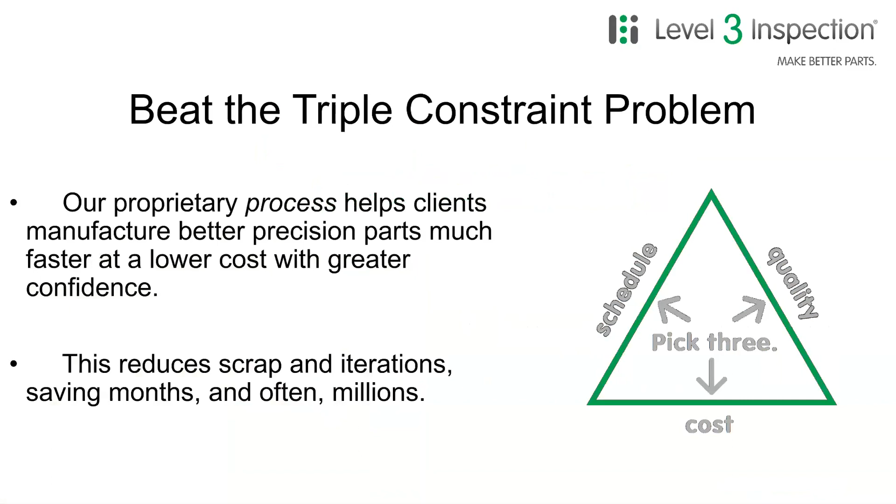Pick two. If time is money for your business, like it is for most of our clients, you can now have three because we are so much faster and so much better and provide such greater value for decision support than any other inspection method or process.

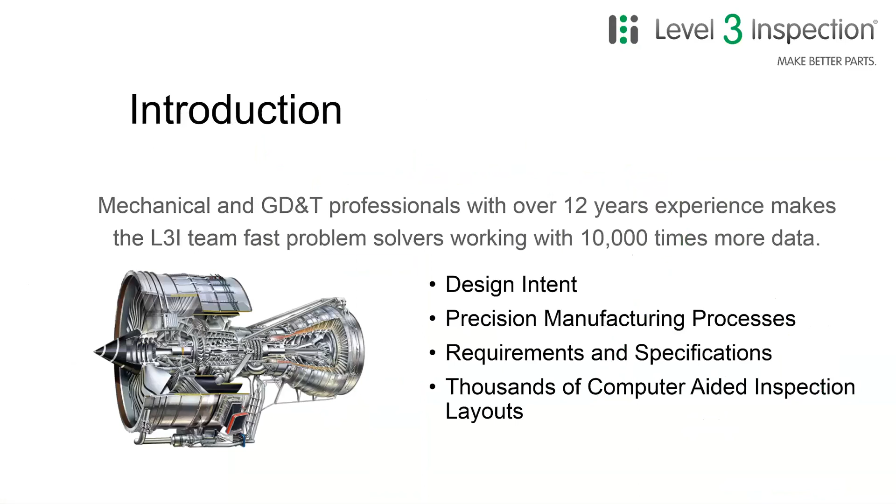By way of background, we are engineers, metallurgical, mechanical engineers with domain expertise in turbine engines, aerospace products, and all manner of precision manufacturing. We're dimensional and tolerance professionals with over 12 years experience using these 21st century optical metrology tools. We understand design intent, manufacturing processes, all of the requirements and specifications, and we have performed nearly 9,000 computer-aided inspection layouts over the past dozen years.

If you haven't seen one before, here's what a structured light metrology 3D scanner looks like. On the right, there is a projector that projects a pattern that moves across the surface of the part, while the lens on the left observes the way the lines undulate across that surface, and it digitizes whatever is in the field of view.

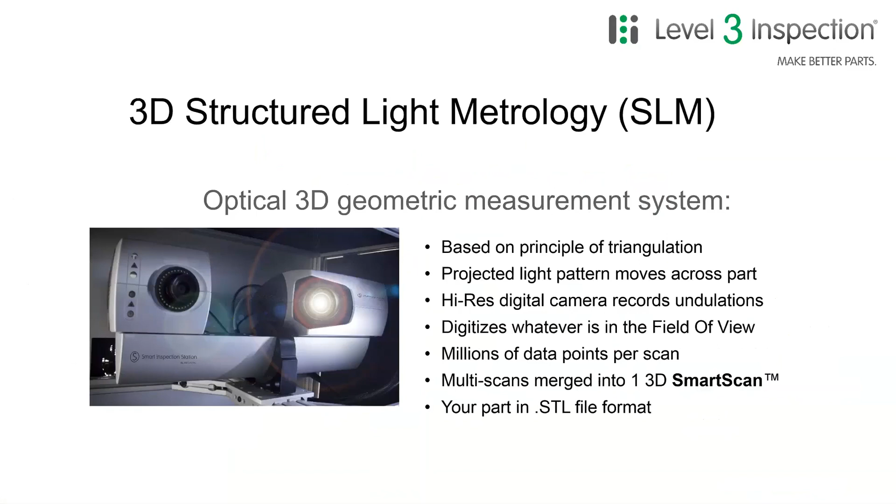Millions of data points per individual 3D scan are gathered and merged together into a point cloud that is then converted into an STL file. It is the surface of the part with millions, tens of millions, sometimes even hundreds of millions of data points, completely digitized, usually watertight, and converted to an STL file format for further analysis.

Where this fits into the process of making parts is as follows. Everything starts with computer-aided design. The CAD model is the master reference file and is what starts the operation of making a new product.

Computer-aided engineering with finite element analysis, strengths of materials, cycling, desktop wind tunnels, whatever it might be to improve upon that design and optimize that design. Then comes computer-aided manufacturing. Regardless of the manufacturing method, some sort of computer control is applied, and they are used to improve production and quality.

Our world is computer-aided inspection, shown in the lower right here, and it is back to the reference files from the computer-aided design process, namely the CAD model and the blueprint and all of the other requirements and specifications that are needed. If allowed to, we can accelerate each of these steps, and we have the experience of improving the

way our customers dimension their blueprints to get better benefit from our 3D inspection. All of these can help accelerate parts throughput, parts inspection, parts deliveries, and parts conversion to profits.

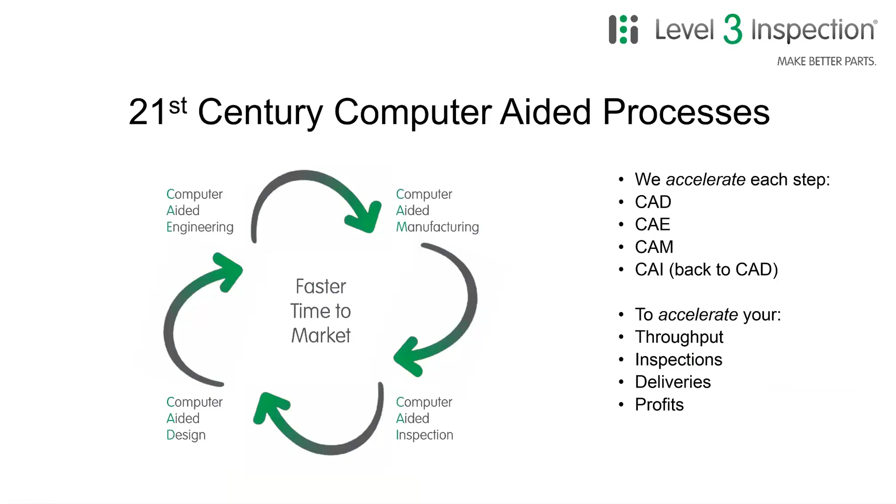An overview of our computer-aided inspection process is as follows. We scan the part, as we mentioned earlier, and scanners are monochrome, so we designate blue to represent the scan file. The CAD model is represented in gold because it's the gold standard.

We don't modify them, we just use them, preferably in native file format to avoid any compression errors. And we align the scan file to the CAD model in a number of different ways, primarily datums, especially for aerospace, but what can also be other features or overall best fit or feature best fit. So there's a number of ways that we can analyze the part compared to the CAD model in this Smart Compare review.

While that is going on, we are computer itemizing the blueprint to create an integrated process that goes from the blueprint all the way through to the report form.

And then we extract the dimensions, either all of them for a Smart FAI or a subset of them, perhaps the critical to quality dimensions for a Smart Inspect, and deliver all of this comprehensive information in an Adobe Acrobat portfolio over our secure FTP server or our client's secure FTP server.

In all, this is digital, it is trackable, trendable, traceable, auditable, and all of our information is also available in XML file format, so it can be integrated into statistical process control systems.

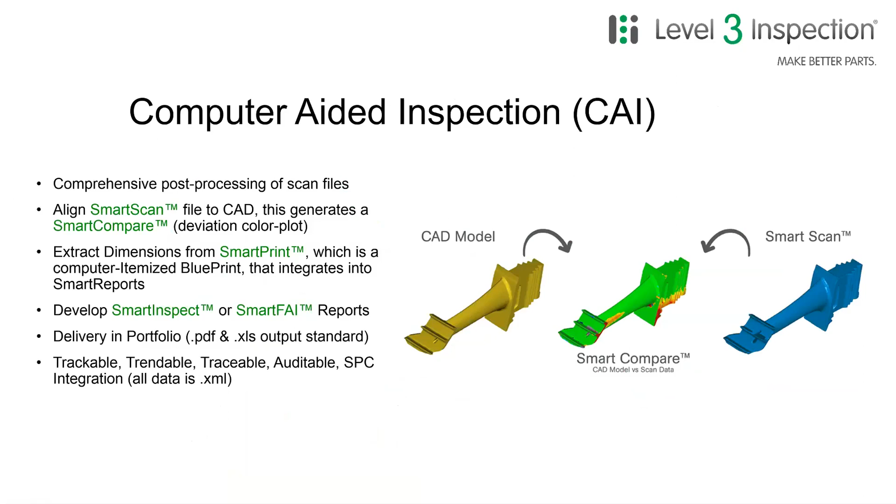Another review of this process is, again, starting with the Smart Print, the computer itemized blueprint that actually creates and merges the data through the inspection process into the inspection report.

The Smart Compare is the Smart Scan aligned to the CAD model in the prescribed way, again, typically datums in aerospace. A Smart FAI for 100% of the dimensions reported, or a Smart Inspect for a subset, less than 100% of those. The AS9102 report form with conditional formatting to show nonconformances, automated data processing into a myriad of other reports for engine prime specialty or any other requirement for electronic output and reporting.

The results that are non-conforming are actually highlighted back on the Smart Print by changing the balloon color. All of this is done with minimal human input to prevent data massaging error. We have an integrated, automated process for doing this where humans aren't cutting and pasting data.

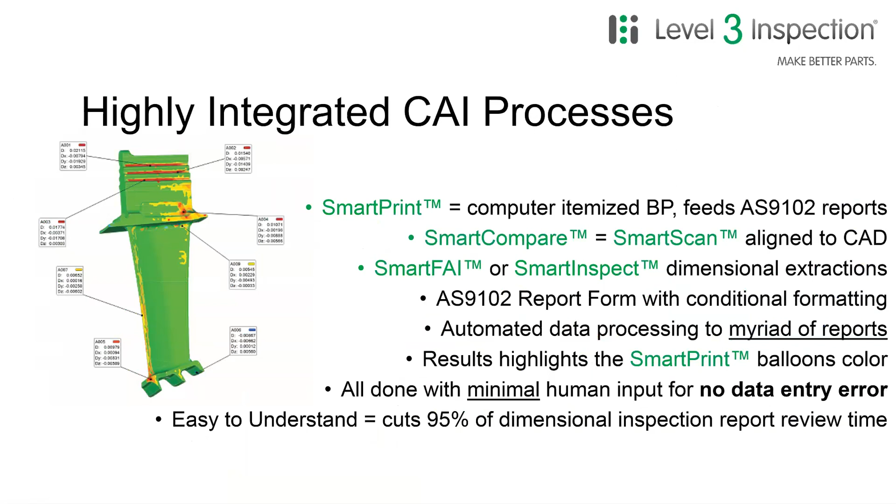Our customers have told us that this is so easy to understand, and they've gained such great confidence in working with us that they have cut 95% of the dimensional inspection report review time that they used to spend. It used to be a man week for the product engineer and a man week for the dimensional engineer, and now it's a total of a half a day.

Around this time, people would like to know a little bit more about the accuracy of our process. We're grateful that Arconic required us to get an ISO 17025 accreditation, and in that independently audited process with a proficiency test, we showed that we are accurate to plus or minus 2 microns, plus or minus 78 millionths of an inch. This is an amazingly accurate process that we've developed.

It's also routinely calibrated to NIST certified artifacts and American Association of Advanced Metrology certified artifacts. So there's, again, distinct advantages of computer-aided inspection over any other method. It's comprehensive, covering the entire part geometry. It's illustrative, with visualization that helps people readily understand the geometry of the part and the product of the process. All of this leads to confidence and improved decision support, becoming speed in accelerating process optimization, conforming parts deliveries, and conversion of those parts to revenue and profit.

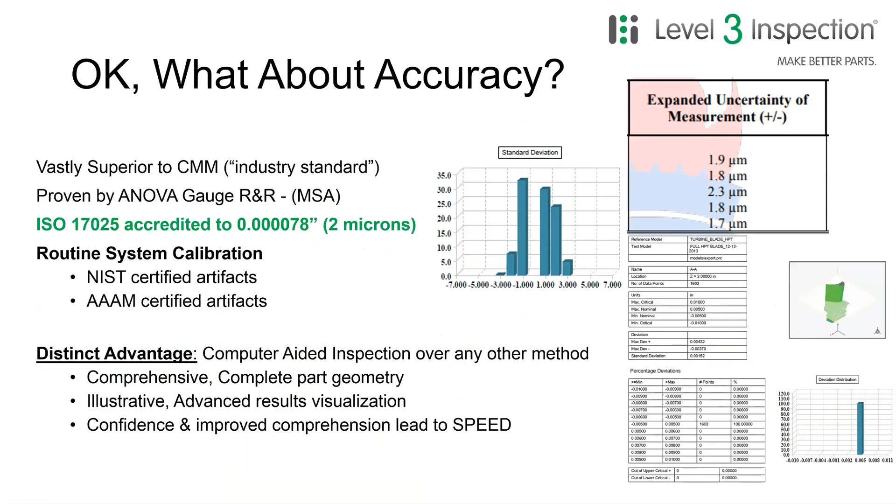We've performed nearly 9,000 of these dimensional quality inspections using these tools, and here's another look at a color plot. This one is static because it's in PowerPoint, but we deliver these as dynamic images in Adobe Acrobat. You can rotate, pan, tilt, zoom, and collaborate with colleagues over the internet. The scale can be adjusted to anything. In this case, green is good, showing conforming as plus or minus 0.005 of an inch from the nominal CAD model.

Non-conforming to the plus material side is shown in warm colors: yellow, orange, and red. Non-conforming to the minus material side is shown in cool colors: light blue, medium blue, and dark blue. The scale can be adjusted to anything, any range, any number of gradations, and it can also be set just to the nominal CAD model without any tolerance band. You can learn an awful lot from these, including dumbing them down to simply pass-fail.

In addition to the Smart Compare color plot, we also provide other reports: the executive summary of our findings with recommendations on how to correct any nonconformances that we find, the Smart FAI, which shows a view of each feature from the blueprint with a line showing the surface of the CAD model, a line showing the surface of the scan, and any differences where measured, and the table of numbers that is also replicated in the AS9102 form. Smart Correlate is what we do to validate CMM programs or other inspection programs, or even reverse engineering CAD models.

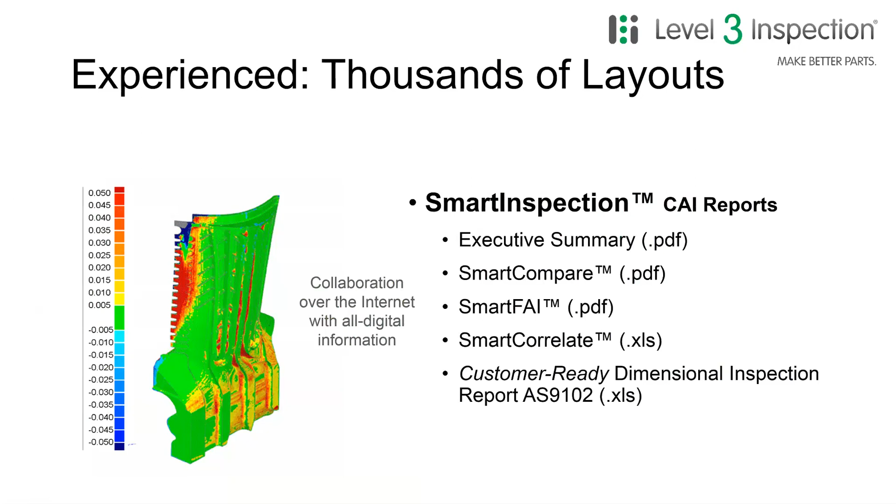Compared to traditional metrology, there are vast advantages to computer-aided inspection. Compared to CMMs, which fool you, and optical comparators, which lie, there is absolutely no better standard for use on this. We say this with some confidence because we prove this every day. The optical metrology and computer-aided inspection process is an objective standard of measurement. It's comprehensive as can be, with millions or tens of millions of data points. The visualization provides vastly improved comprehension, leading to greater confidence.

Everything being digital means that you can always go back and get the information that you want, and trend it and track it. And because it is Excel file format, it can be put into statistical process control, and it can be done faster and cheaper because no precision alignment fixture is required. It's simply superior to traditional metrology, although we can always correlate to traditional metrology.

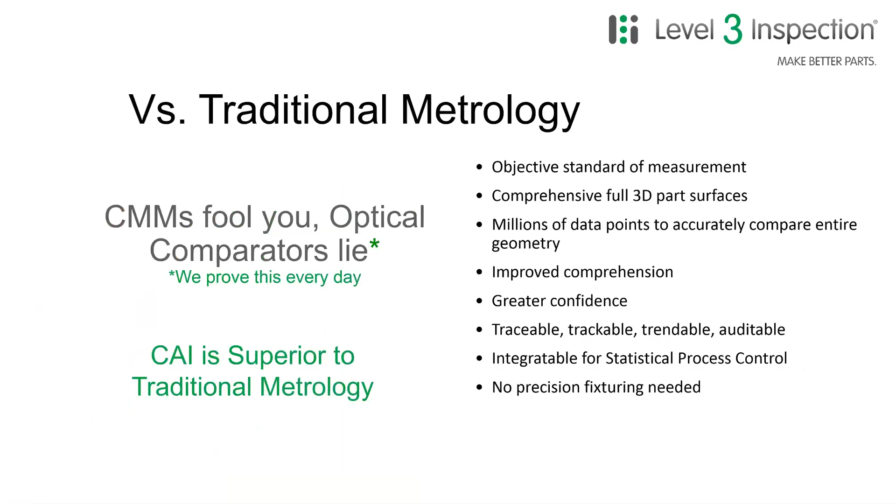We've performed hundreds of correlations and we've never failed. We've been performing these computer-aided inspection projects for a very long time and have earned quite a bit of accolades from our customers. The one on the lower here is actually from a correlation study that we did comparing our process to their CMMs, in which we overlaid their CMM touch points onto our scan file and showed that everywhere they were touching the part, we were getting the same measurement to 4, 5, or 6 decimal points. Their conclusion is that computer-aided inspection is a more accurate representation of the feature true size and form, superior to the CMMs.

Harold Slatterprice, the Airfoils Division, PCC Airfoils Division Quality Manager, is one of our longest customers and most outspoken supporters. This is his opinion that we are the industry leaders and experts in this computer-aided inspection field. We appreciate that. We've worked with a variety of different manufacturing methods.

This one had to do with additive manufacturing of metal parts with direct metal laser sintering, or laser melting. This was for F135 vane segments for Pratt & Whitney, and we got involved with them and rapidly accelerated their dialing in of the additive manufacturing process so that they started meeting the production delivery requirements for Pratt & Whitney. Things were going so well for them that they got bought out of the market by arch rival General Electric Aviation, and now this company is called GE Additive.

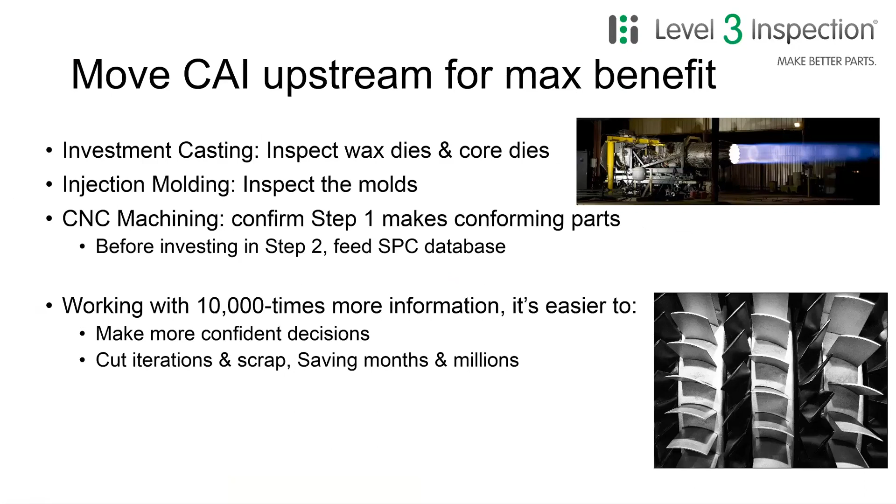There's a number of ways to do business with us. The longest standing method is to ship us parts and have us provide scanning and inspection services, ship the parts back, get whatever scope of inspection work that is wanted, and we deliver that over our secure FTP server or our client's secure FTP server.

We can also optimize the manufacturing process, sort out part fit and function, and even do some reverse engineering of legacy parts if that's what's needed.

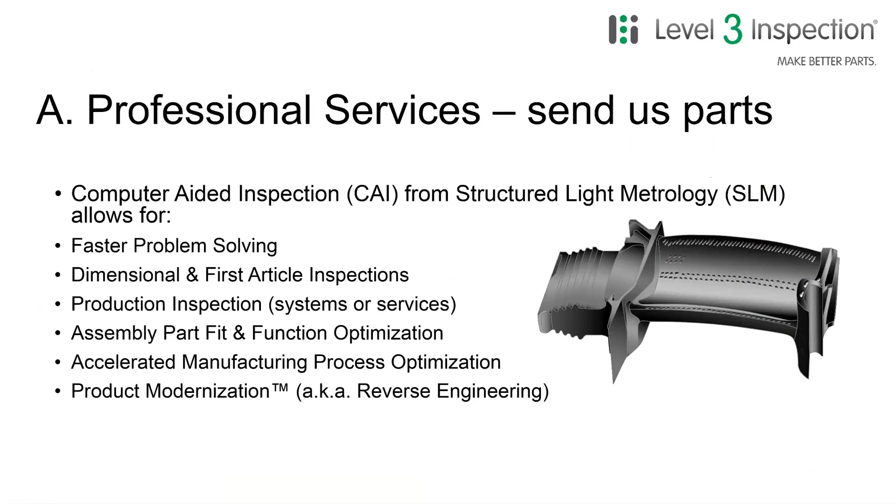If you don't want to ship parts out and prefer to keep things in-house, we have developed and patented an automated system to perform this computer-aided inspection process on your shop floor with a junior level technician who simply sticks a part in a gripper, barcode scans the router that came with it, and comes back in 12 or 15 minutes, and the part is completely scanned, dimensionally inspected, dispositioned, and the report is put on the server wherever it's supposed to go. This automated system is fast and effective.

The image shown here is configured for parts up to about 20 inches in dimension. It is also capable of other configurations, and any size part can be automatically inspected.

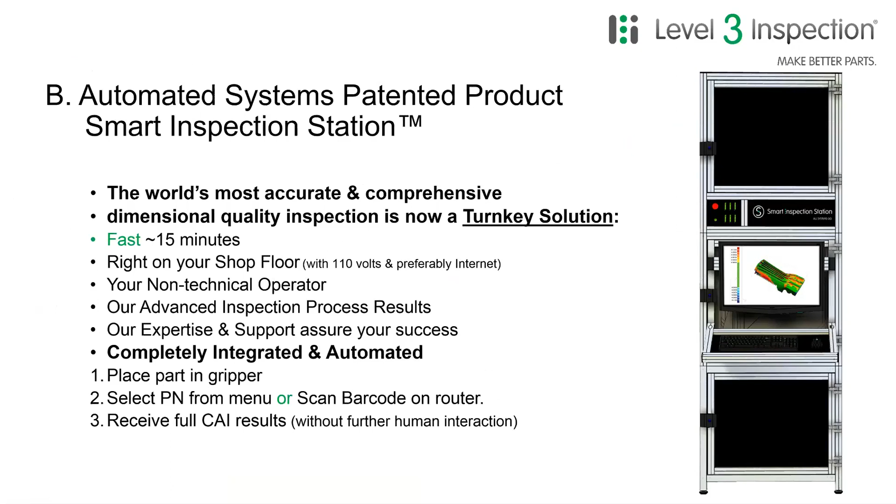If you don't want to ship parts out and you don't want to CapEx a six-figure inspection system, we can, on a services basis, bring our technology, our technicians, essentially our computer-aided inspection lab, and co-locate it in your plant. We'll bring a configurable scanner, an experienced operator, and perform the engineering and analysis for fast reporting at our headquarters until we can automate that process to be reported automatically and quickly on site.

We can arrive with 36 hours notice, and you get to skip the learning curve, skip the CapEx requirements, and accelerate the benefits of computer-aided inspection, all under a services agreement right in your shop.

For those that have purchased 3D scanners, we have developed a telemetrology service where instead of sending us parts, you send us 3D scan files. We analyze them and report them for you, automate the process to give you the answers that you need to rapidly optimize the process and deliver those parts to your customer. This is one of the fastest ways to get benefits from the 3D scanners that you may have acquired.

One of the other ways we've developed to leverage the non-recurring engineering, the setup from a first article inspection, is to spread that across the periodic inspections and the production inspection with a very rapidly decreasing price schedule over quantity of parts, bringing the value up using the tools we've developed for the first article inspection across the production inspection range.

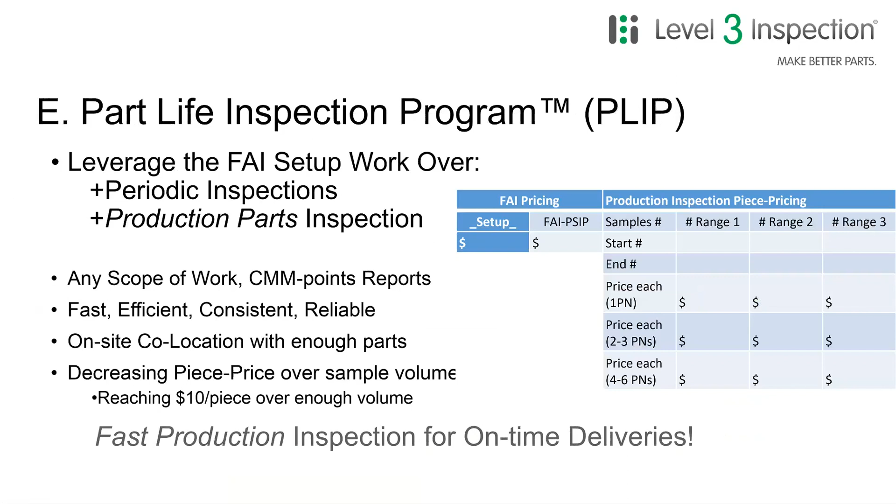We have other things that we've developed from working on this process for over a dozen years, including our Dimension software that starts by creating a balloon drawing, fast and easy, can handle multiple samples, but ends up being an integration tool from any input measurement, including CMMs and E-gauges, and of course optical metrology 3D scanners, to any output report or format, including AS9102, anything that any of the engine primes want, and NetInspect.

This is a valuable and useful tool that can handle an unlimited number of samples and is available for an individual or site license. And of course, there's a free trial demonstration, or a free trial license available on our website at level3inspection.com. We've been working in this field for a long time.

We're excited to be handling more projects and expanding our client base to help accelerate conforming parts deliveries across the aerospace supply chain and delivery of airliners to the marketplace. Where do you want to go from here now that you know what we can do, and how soon should we get started to bring these benefits to your operation?